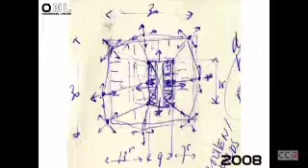To put our work in context, I can also have some points of critique on colleagues. This is OMA. So when OMA thinks they have to make variations, they have 100 students or trainees, and they make variations on one tower to reach this goal. So is that parametric? No, it's not. It's just a waste of time and work, I think. So the way I would like to approach it is to have one system where I can tweak all the points, all the vertexes, also designed for a tower, with a completely different attitude. Then I write a program where I can tweak all these points.

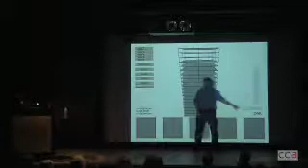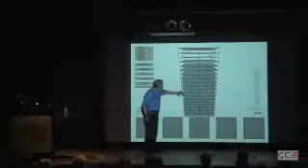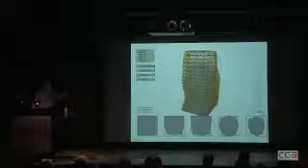So I can tweak those points for all of these floors, and while tweaking, this is my target value. I need to make 20,650 square meters because that is what the project developer wants. I don't want to disappoint him. I want to give him exactly that. But I also have my freedom in tweaking these lines and all these points and having the curvatures. And I can exactly keep track of what I'm doing. So that process has led to this design, which is exactly 20,650 square meters.

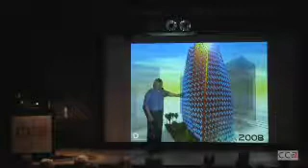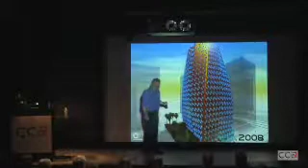And the interesting thing here is also that in the process, things change. For example, 1 week before we had to submit for building permit, there was an extra elevator planned inside. So we had to pump up the whole volume again to reach the same GFA, because the elevator is not in the GFA. So we had to tweak all these curves again, and we did that whole work within 1 week. We redesigned the whole design because it was a parametric system, because it was consistent, and all the parts were related to each other. So this is an important quality or potential of parametric design, that you can have all building components related to each other in every stage of the project, from sketch.

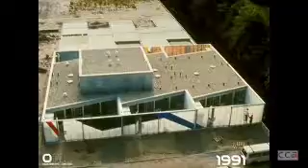And that was another important step we took. And of course it does function. You could slide doors open and put your car in there. So it was a very pleasant way of living, actually, in this patio housing in the middle of the city.

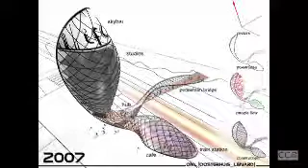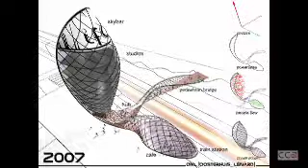So this is another example of those power lines, that's how we call them, these intuitive gestures. They can constitute a building, eventually. So it's one gesture, and we already have in mind that it's becoming a tower, and that's becoming a bridge, and that's becoming a canopy-like structure for a train station and a restaurant. So we already have that in mind, and we make the sketches, and then these sketches become exactly the basis, very precise, for the later building. Then we construct surfaces, and we pop a network or points or what we do.

This one has not been built. Another example of an intuitive sketch directly translated into a building. And actually the interesting thing is you can just do this. There's nothing which stands in the way. You can just do it. Of course, we have to find a system how to build this, how to build components and how to connect components to each other. And of course, here's another system embedded in it. You have to think of that component and the others. How do they connect to each other?

For today's architecture, I think it's not so much the isolated things themselves, but how they connect to the other. I think that is one of the basic things we are worried about these days. The essence of how we operate: it is very much like procedural work, procedural painting. So generating sketches is already a procedural act. And the way Ilona did it, for example, was making hundreds of sketches, in one or two seconds, very fast. What Jackson Pollock was doing is also very procedural. It's a method. It's very methodological.

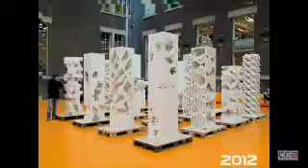So looking at colleagues, Winy Maas and MVRDV, this is what Winy is basically doing with his legoization, so to say. He has thousands or millions of these Lego blocks, and his theme is porosity. So I want to position our work in relation to this by making two statements. His building block is always the housing unit, the block itself. Our building block is a building component, which is much smaller than that. The other statement is, this will always remain low resolution because of the size of the building block, and it will never be able to expand the language into high resolution.

Yes? I'm just curious, you mentioned sort of... Where are you? Oh, all the way there, yeah. The gesture, the sort of intuitive sketch, I'm just wondering what gives that primacy as a motivator? Why do you start with just the gesture? What gives that its validity as a starting point for design? Well, I have more examples of that. I need information. If you design a system, the system needs information from outside.

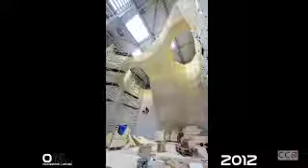But actually, if you have a good quality of all these skins, you can do it. And then it's no longer an issue. And it's high resolution, so that's the other thing. So this is, for example, a sort of in-between step we are taking with our office. It's a climbing wall system. It's very systemic. It's open to information from our side. It's open for interventions by climbers themselves. It's an open design system. It has the building components. It has a higher resolution than the living unit. And you can build anything with that. So that's actually the translation into practice of that attitude.

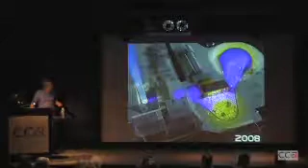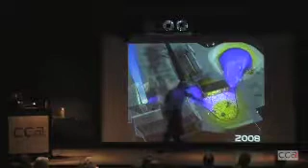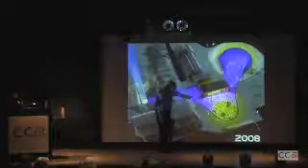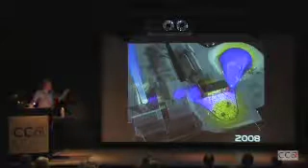This is one of our designs where we have a very high resolution actually in a roof. It's an underground project, and there it becomes a landscaping exhibition hall. And it's all based on that building component that can also become larger, and then it can shrink and expand. It's a complete parametric system, and it's completely moldable. That is higher resolution. As high as we think now is feasible.

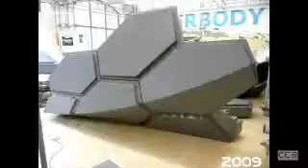But it's higher resolution. So this is the kind of resolution we are working with in our Hyperbody group at TU Delft. This is a building block. It's fully parametric. It can take any shape, but it's always related to its neighbor. It's almost like, and that's the comparison I often make, this is a bird, and that's another bird, and that's another bird, and together they work in a flock. And they are always measuring the neighbor. This reference point is always questioning that reference point here, which is the point of gravity.

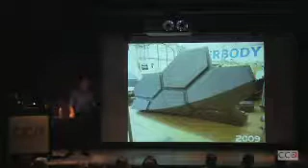Where are you? What is your distance? And that is the kind of thinking we are completely immersed in these days. And I think that is a very good way forward for a next generation building to think like that.

We have to change the very building blocks of architecture. That's basically the message. So don't think bricks, don't think prefabricated housing units, but think of building blocks that are fully parametric, fully controllable, both by your top-down design acts, radical or not, or by systemic emergence from the system itself.

I also use an approach like that, where maybe you have a series of points and they all relate to one another. Yep. But when the purpose of it is just to manifest a form that you sketched out, that's where I start to lose you, because I can see a valuable purpose being cutting down on material waste or creating some sort of unique lighting situation for a unique program. But when you instead stop looking at function and just make a parametric system to realize an intuitive sketch, that's where I start to kind of lose you.

Well, there's more to it. So stay with me. You will find out. There's more to it. Okay,

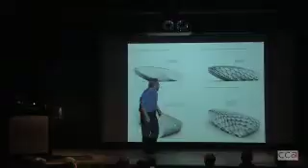the point I want to make here is that, okay, we have these swarming elements, but some elements may be a window, or some elements may be a ventilation unit. Some elements, well, not indicated here, but you have to imagine that, can be a heat or a cooling unit. So we can actually, and maybe that's already a sort of answer to your question, assign functions to each of those components. And all those functions together form a climate, a space, a building that functions according to a pre-requested program, etc. So that's how we can work with it.

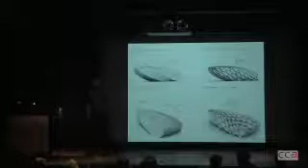But whatever happens, the relations, and that is what actually I wanted to say, these relations must always be kept intact. Don't lose the connection. And that's, again, the connectivity point I want to make. It's always about connectivity, both in its meaning, in its construction, and in its functioning, its operational life.

Okay, what you see here is the construction of that climbing wall. You see first reference lines. The system is an open system. So what happens, for example, is that some of those lines are curves that we like. We as a designer think, okay, it has to be that. Other things you see is that there are sort of sloping things in the climbing wall that climbers like. So climbers like a challenge like this. So that is the input of the climbers in this open system.

So that's actually how we did it. We sit together with climbers. We have our own preferences for curves. We sit together and they may tweak the curves as well. They may tweak the model. So they become co-designers. It's an open design system. That's what I like.

And then it has to be open to all sorts of ends, yeah? All sorts of threads where you can actually pull the strings and you weave all those strings together to make your project. Skin is an important issue, but not separate from structure. I will show you that. First, skin as such. Skin of the water pavilion. So it's new materials. It has a new quality of a skin. This is a very rough skin of the water pavilion. It's polyurethane. Okay. Spend not too much time on each individual project.

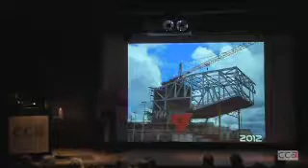If you see this structure, it's a mess. I simply have to say, it's simply a mess. It can be anything. You see all sorts of hybrids, even in the steel itself, and then strange mixtures with the concrete. And somehow, this happens all the time. It happens to Zaha Hadid. It happens all the time. You see this fashion around it, and you see this very traditional structure inside.

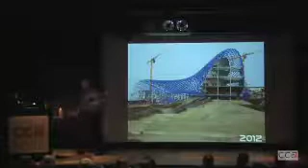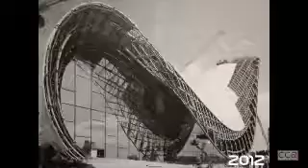And even, which is weird, this structure, which is absolutely able to bear its own load, is supported by these. It's not right. And I'm absolutely sure that she doesn't really want this, but this happens if you don't integrate the way you structure it, you construct it, into your design process. If you don't relate it in a way that it cannot be taken apart. Well, it's clear that it's like a drapery, like fashion, and that it's very difficult if you start like this.

If you have this intuitive design approach, which Zaha Hadid obviously also has, if you don't connect it to your design system, how it's built up, Patrick's part, so to say, then if it's too loosely connected, you lose that connection between the skin and the structure that supports it. Okay, let's see how we try to do it. So all we do is we try to do what we think is right. And that's also typical Dutch, by the way. But, okay, I cannot change that. And it was orange too, but it tastes like lemon in this case.

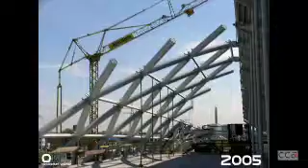This is the cockpit structure. This structure is completely in sync with the skin. It's developed together, and if something had to change in the skin, some of the dimensions, for example, glass dimensions, you have to cut it in a certain way, and you cannot extend certain sizes. You have to change the structure as well. So everything is related to each other.

And it's a building kit. It's IKEA. Basically, it's IKEA. You have some of these components. They're all different. So in that sense, it's not IKEA at all. So it's parametric IKEA. You have all these components, and you bolt them together, and surprise, surprise, you get your building. It's that simple.

And you can do it, well, you have these one-person offices. They can do it because it's that simple. If you build this relation properly, then you can bypass contractors. This building was not built by a contractor. It was built by a steel manufacturer. You can have a direct link between you and your design system and the one who makes it.

And yes. Well, there's a lot to say about this, but it's also used for movies. It's a very nice space inside. It is a showroom for expensive cars, like Rolls-Royce and Bentleys, Lamborghinis. But now it's taken over by another guy, and he sells Lexus. I'm not sure that's the proper one.

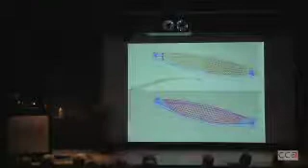This is the acoustic barrier. So we have, no. This is the cockpit. Back to the acoustic barrier. First we have this swarm, but they are already nicely aligned with the power lines that are imposed on the system. So then we have these aligned points, which are the birds, and then we can run our scripts. We can run our scripts that exactly describe where these points are, what their relations with the neighboring points are. And from those points, we develop the detail.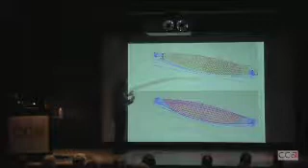Then we expand the point with all sorts of sub-points, subsets of points that actually, in the end, describe the detail. So this is how we did it with the cockpit in Pro Engineer, another program. We have all these points actually driven by a mother curve, a law curve, so to say. So there is some sort of law and order here, but it's radical, it's irrational. It's driven by that. So we have all these numbers, all these points, and related in this network. And, oh, I don't have the next image here.

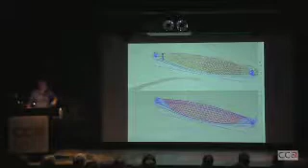Okay. I have to change the story then into this project. Yeah, I'm so tired of these linear presentations because I want to jump, and I cannot jump in this PowerPoint presentation. So,

Okay, this is all the data you need to build it, and driven by what I already said. The angles are driven by the climbers and the curves by the designers. But this is about the scripting part.